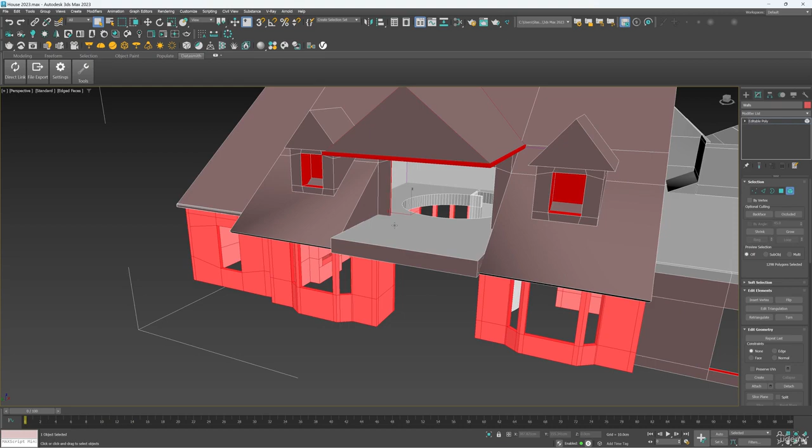Now I will select the element that I want to detach. I'll start with the big parts. Click Detach on the right panel to detach the element. Select next element. Detach. Make visible all layers except temporary and default.

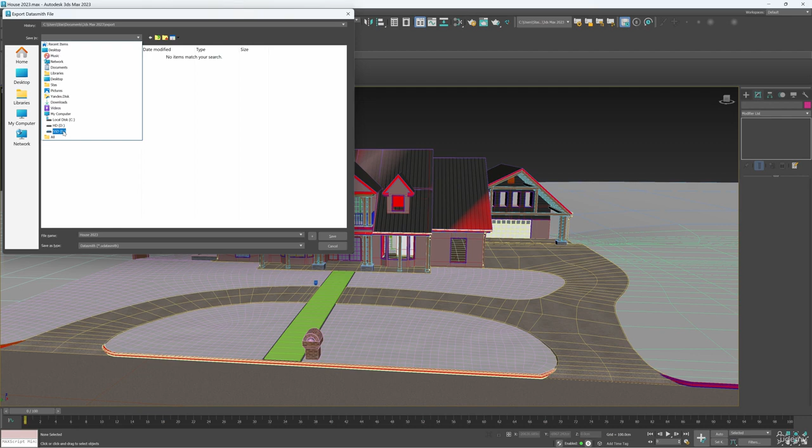Use Datasmith to re-export the scene. Select the folder with the previously exported scene. Replace files. Go to Unreal Engine and find the folder where the imported scene files are located. In my case, DS import.

Open it. Right-click on the Datasmith scene file. Re-import. Leave settings as for the original scene. This helped to solve the problem in some areas. I will continue to detach fragments of geometry with problems. Back to 3ds Max.

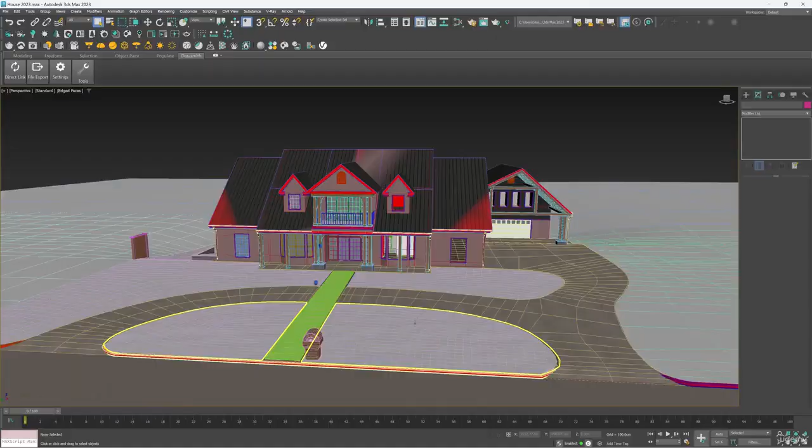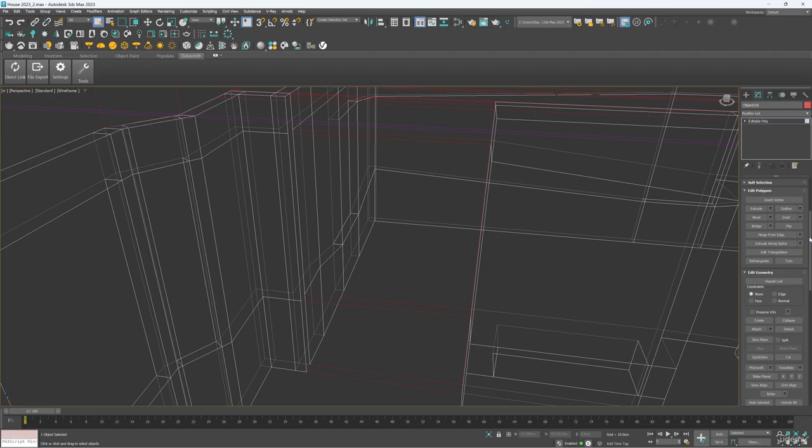Find and detach the elements that are colored pink. This section of the wall has a problem. I'll detach it with the help of polygon selection. Next, the walls of the entrance. This part needs to be fixed.

Re-import again. Looks much better. Fix the remaining problems in the same way.

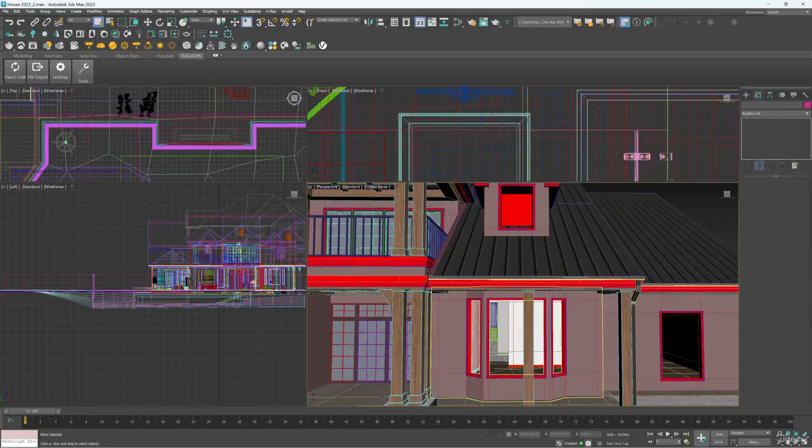Go back to 3ds Max and hide all layers except interior decor. Break down the decor on the ceiling and windows into separate elements. To do this, convert the decor to editable poly.